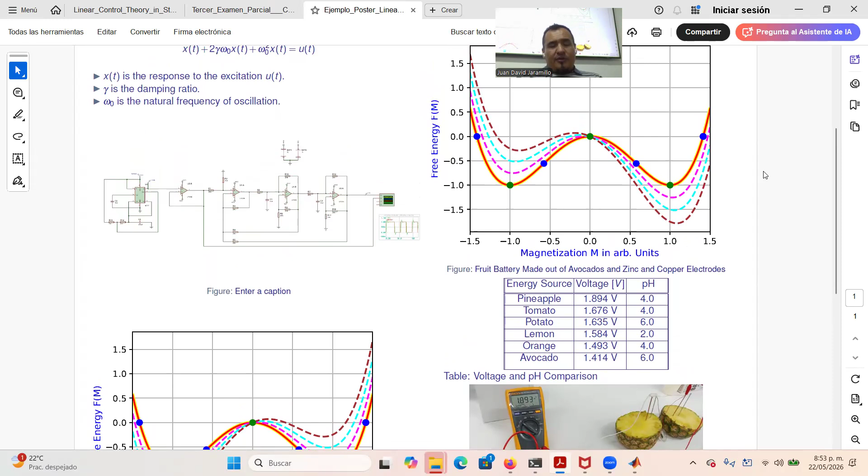A schematic of the linear network with op amp, please. The state space canonical controller realization is then given by...

So this is left, this is... so this is begin array end array.

Okay, so then here, well, actually I think it would be meaningful to have a feeling for which state variables am I going to select and how I'm going to select the state variables.

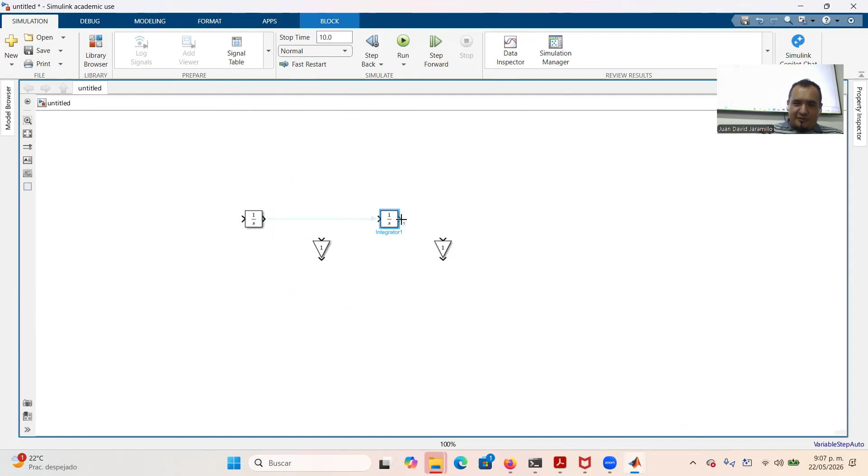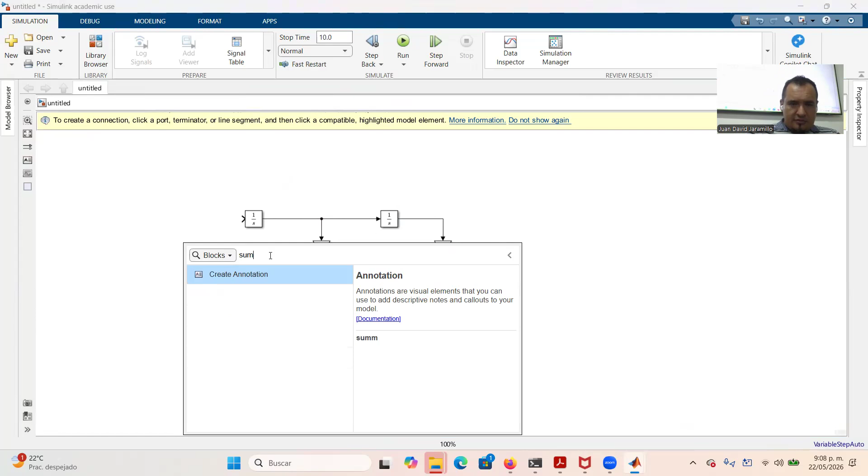So let me see, I need that summator. Here it is.

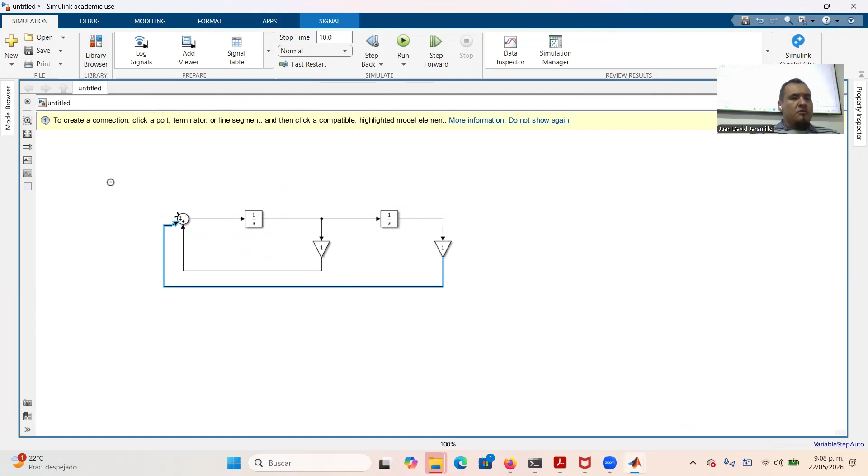Okay, so then I need a signal generator. Okay, pulse generator, that's what it's called.

Then this will be, I mean, if gamma, well, you know what can we do? We can do this, let me try it out. So here you can say that G is equal to 0.25. You can say that omega 0 is equal to 1 rad per second. Okay, so you can call them here.

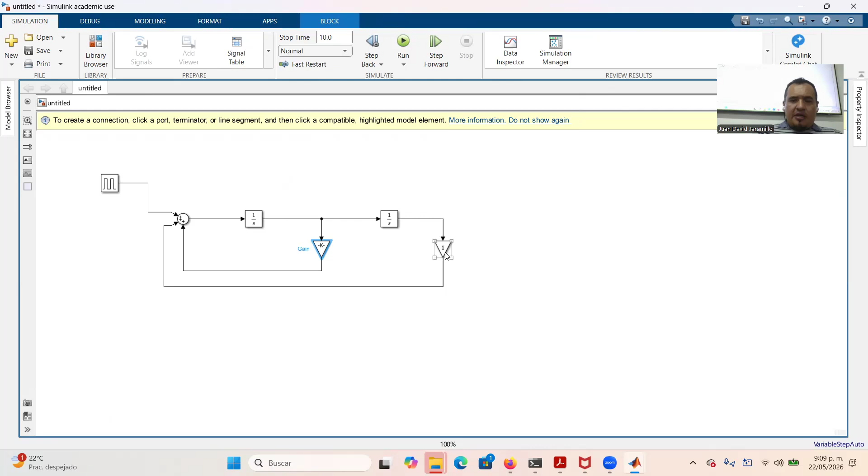Call them here and just say that this is minus 2 times G times W sub 0. And here, just say that this is minus W sub 0 squared.

Good. Now, if I go and check the picture that Santiago sent me, for instance, what is the step response? I don't understand the time here.

Emmanuel, can you come for a second please? Can you come for one second?

So the time here, I mean, how long is this pulse? Seconds, 20 seconds? The period is 40 seconds. Okay, that's good. So I can simulate the period for 40 seconds. Thank you very much.

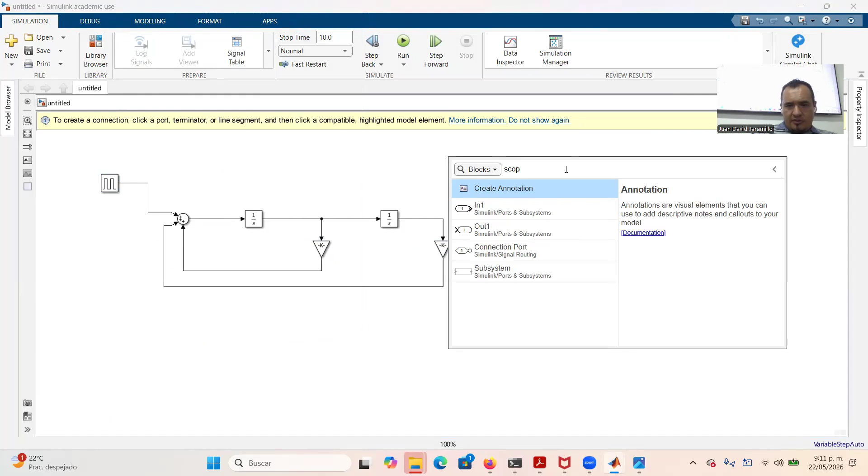So, 50, that's it, and I need a scope. Actually, it's quite a good idea to have a scope for the states as well. Number of ports two. Okay.

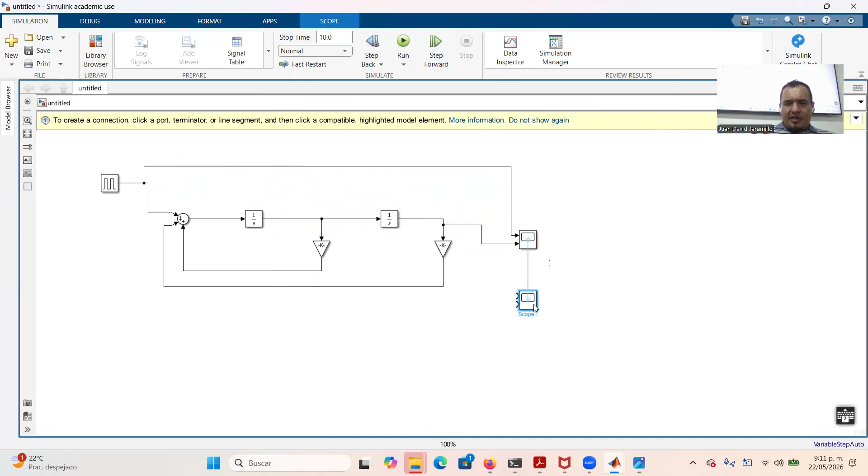So we're going to check the input and the output, and here as well we're going to check the states. So this is X1, and this is X2. That's it, so we can simulate for 100 seconds and see what happens.

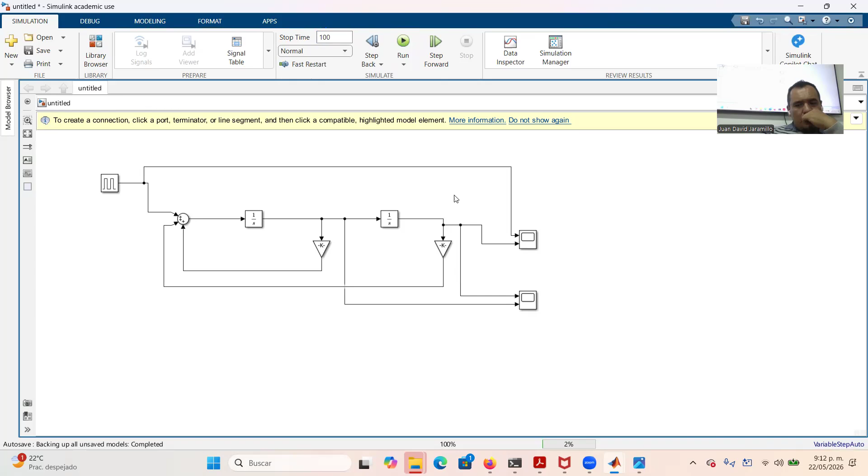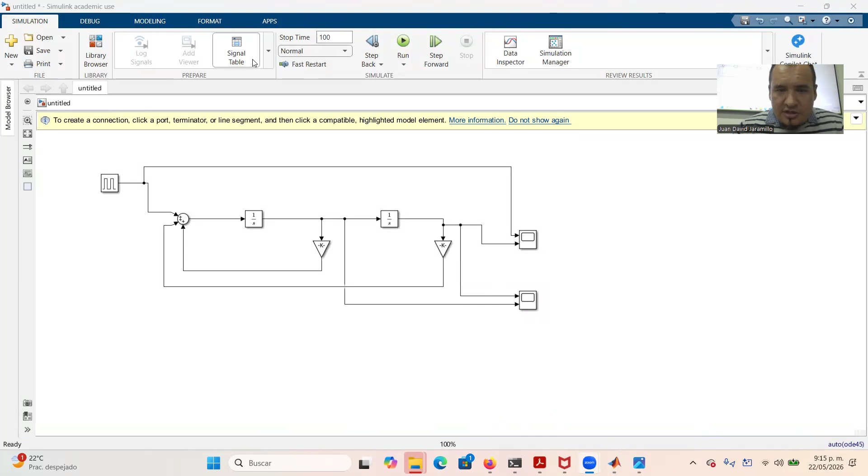So now let's check, this is the output. Well, it looks good, but the sampling time, well, that's the problem, the sampling time.

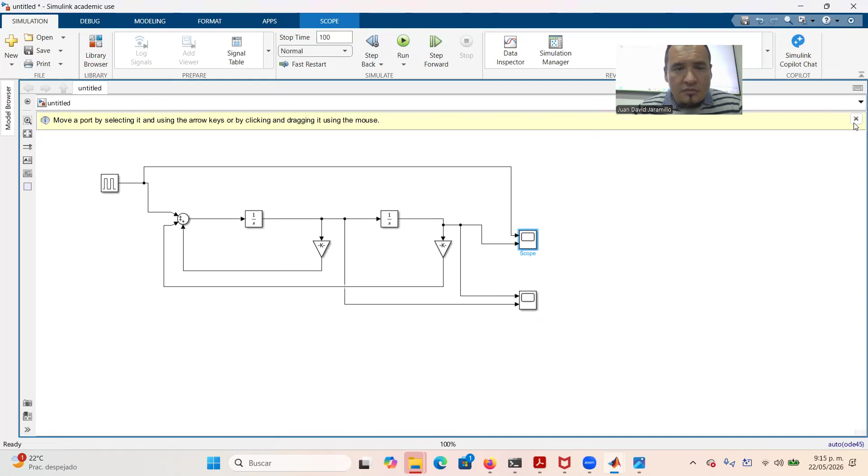Scope, just one second. Tell me.

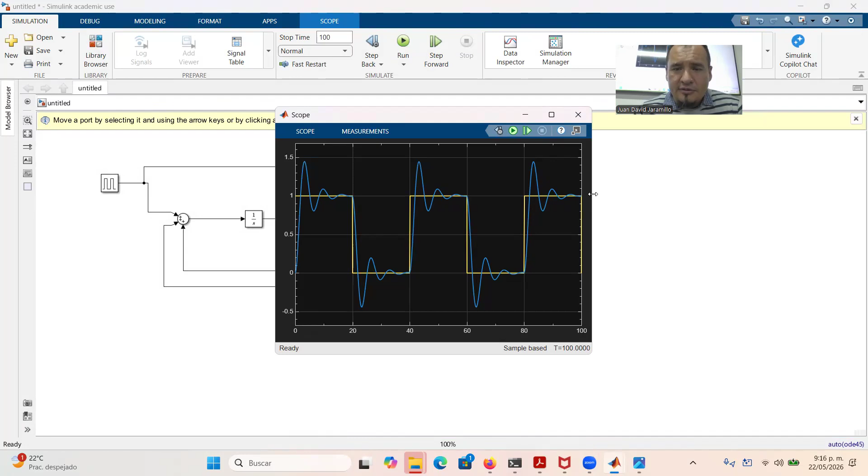So, well, that looks much better. What about the states? These are the states.

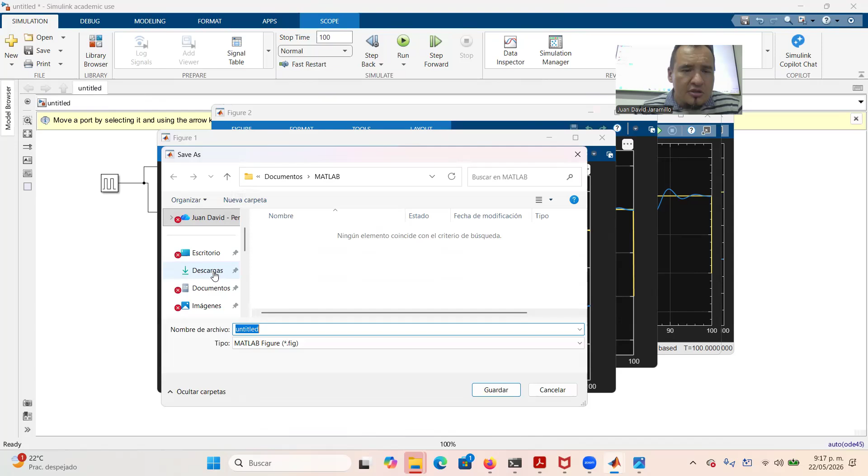It says screen display to figure, and what that means, I mean it's supposed that you then, figure, save as. So downloads, I would want to do this as PDF. Just let's try it.

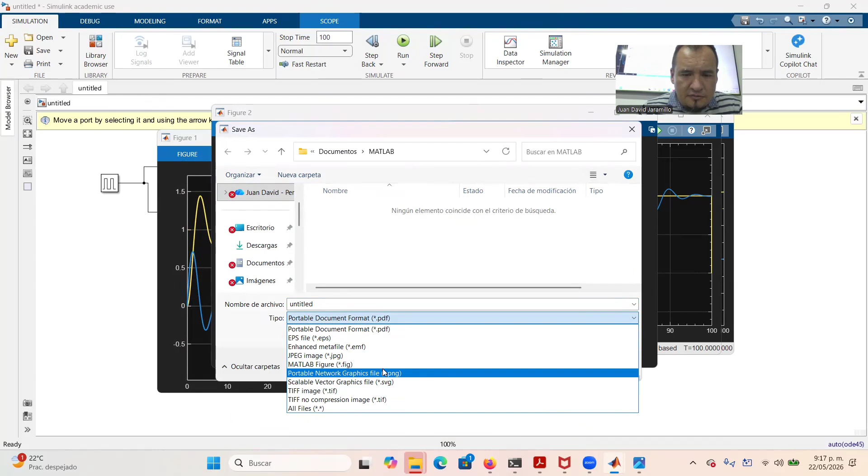State variables. Response, input. So okay, so just let me see.

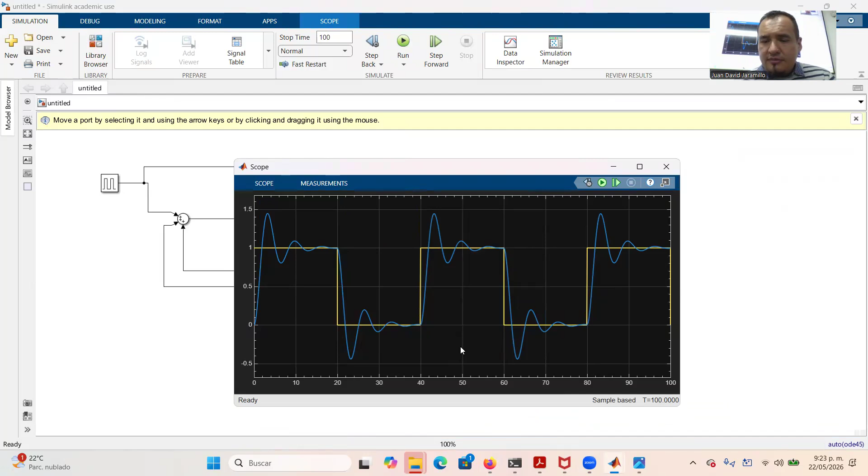Okay guys, so I think this looks good, but the problem is the format, so I think we'll have to change format. So let me do this. Let's put this into a figure. Okay, let's save this thing as an EPS.

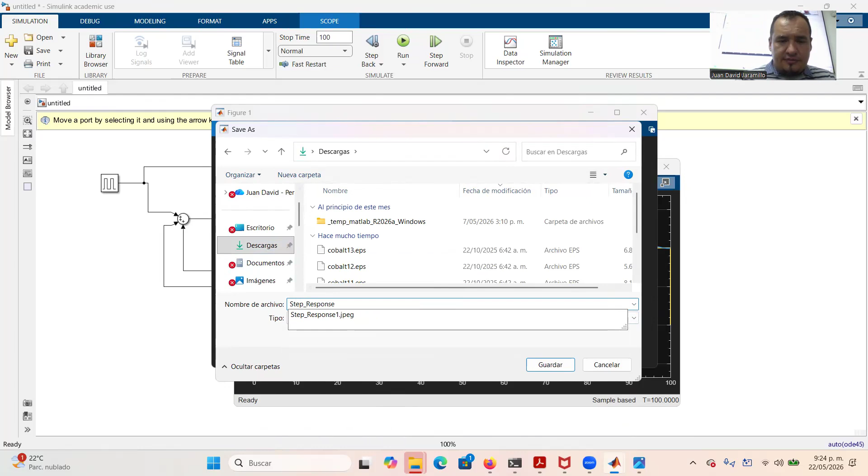Response. Step response. And let's see the states.

Print to figure. I actually wonder if one can have a white background in these plots? I think one can, but I just don't know how.

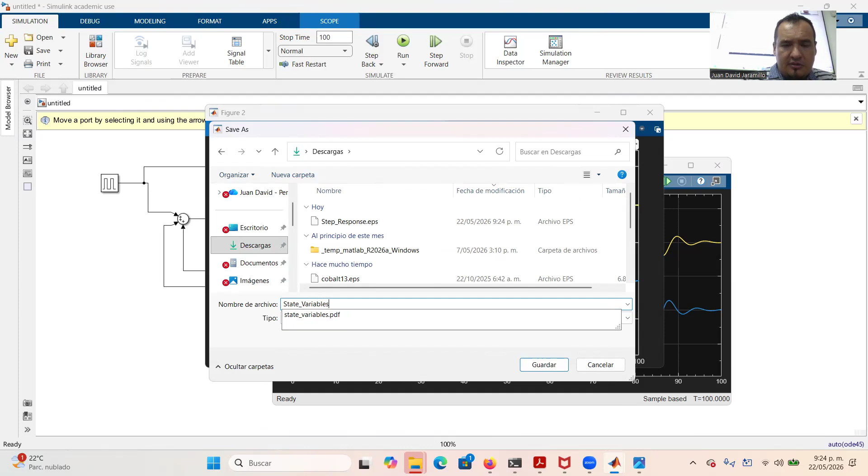So, state variables. Okay, it looks good.

Let's upload these figures. And here this is the step response.

Well, that's much better, and it's still, so, well, that's a bloody problem. Okay.

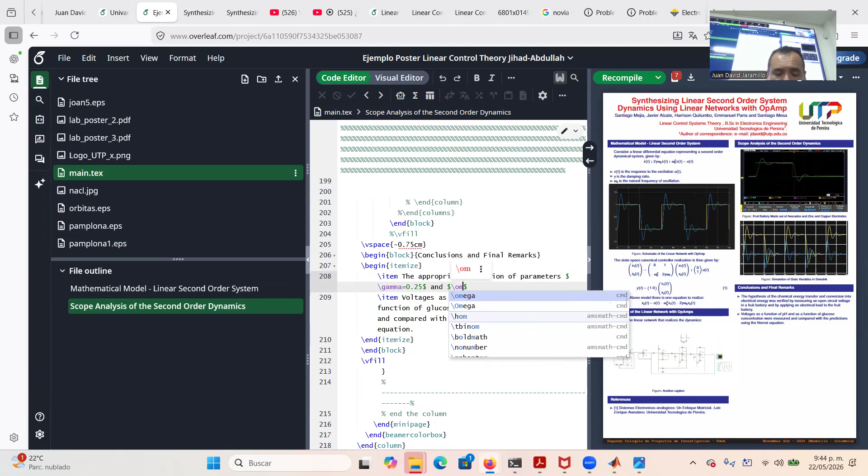The appropriate selection of parameters, gamma equal to 0.25 and omega sub 0 equal to 1 rad per second, yielded proper second order under damped dynamics.

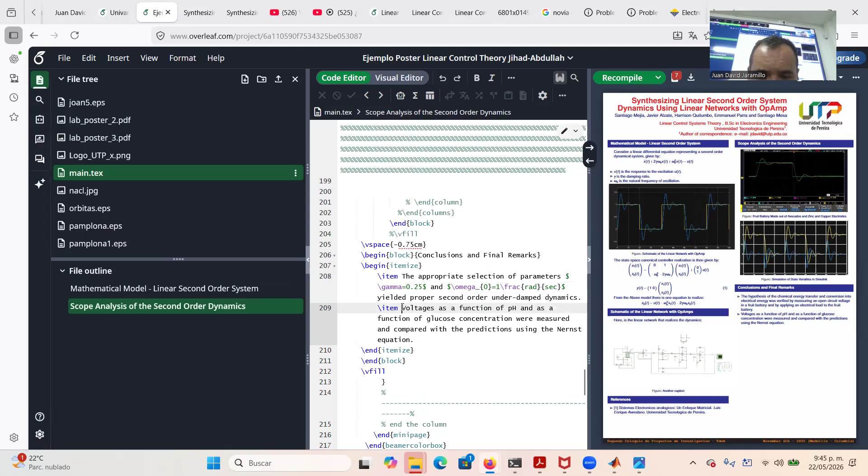So here, what we will have is this. Using an integrated circuit, 555, we excite the linear network with op amps, realizing the dynamics, realizing the second order under damped dynamics, and one can observe the under damped behavior in the scope.

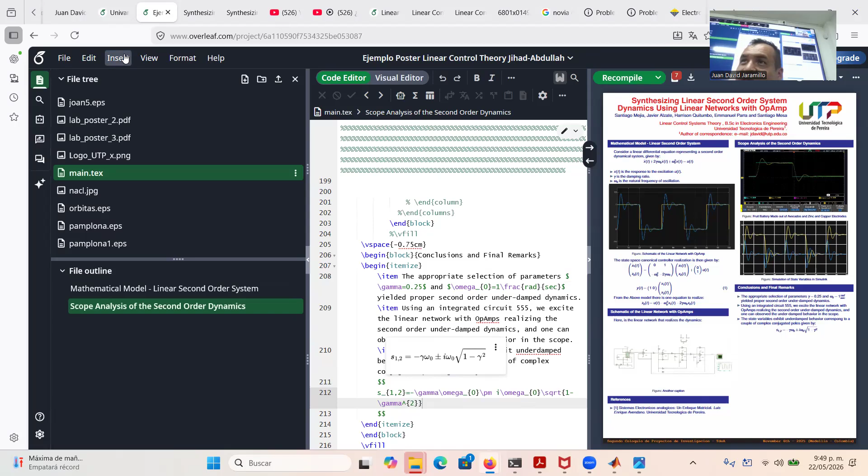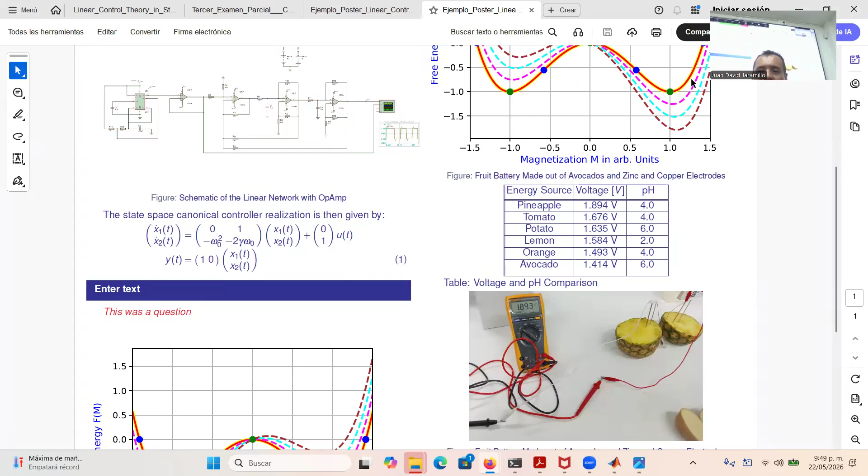So, I mean, I think this is a very functional poster. That's pretty much it. I will just place another plot here from the scope, an electronic scope, and then that will be pretty much it. Okay.